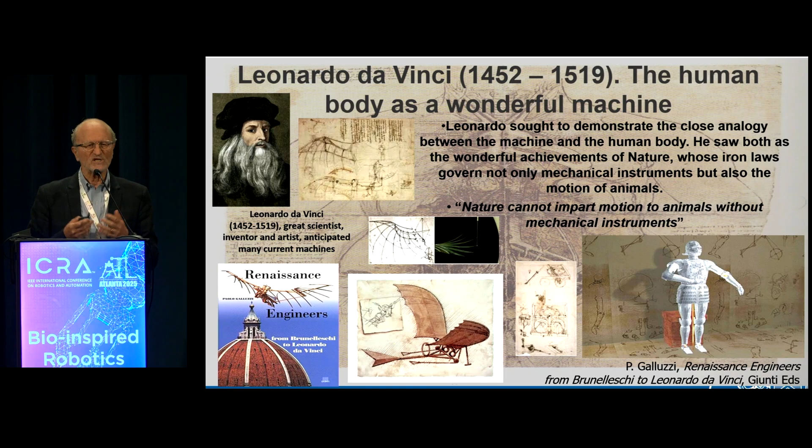So for example, you see what he wrote about the human body as a wonderful machine. And obviously, he was interested, probably was one of the first in the world to combine arts with science. You see here how he observed and analyzed the behavior of many biological systems, in zoology, in botany, and of course in human anatomy.

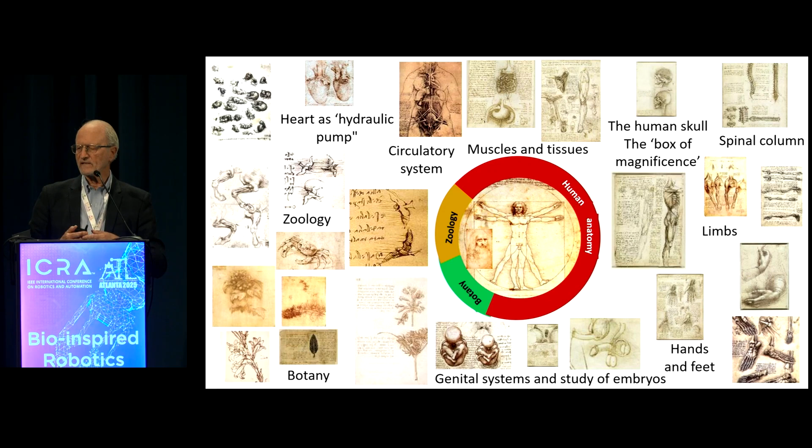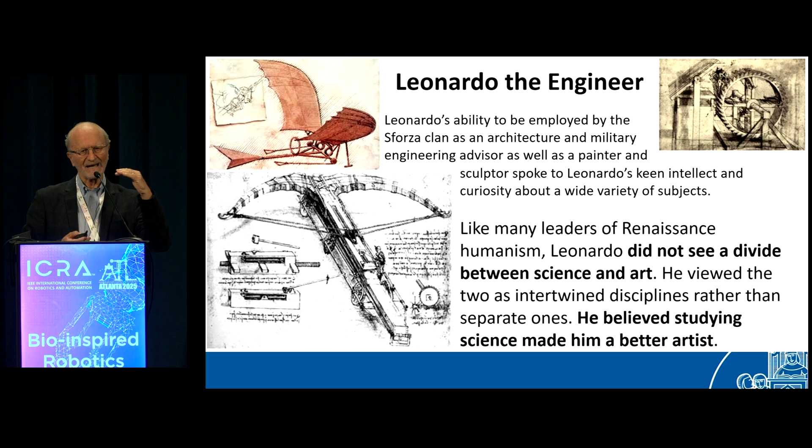It's fantastic. At the same time, he was a wonderful engineer. At the time, of course, he didn't have the energy source, he didn't have the materials, and what really made it possible to make the design, he was really inspired by nature, and he combined the systematic, scientific analysis of biological systems with engineering.

And today, we are addressing this fascinating field with the help of four distinguished speakers who are really leaders in the field: Kyu-Jin Cho from Seoul National University in Korea, Dario Floreano from EPFL in Switzerland, Talia Moore from the University of Michigan, and Yasemin Ozkan-Aydin from University of Notre Dame, also in the USA.

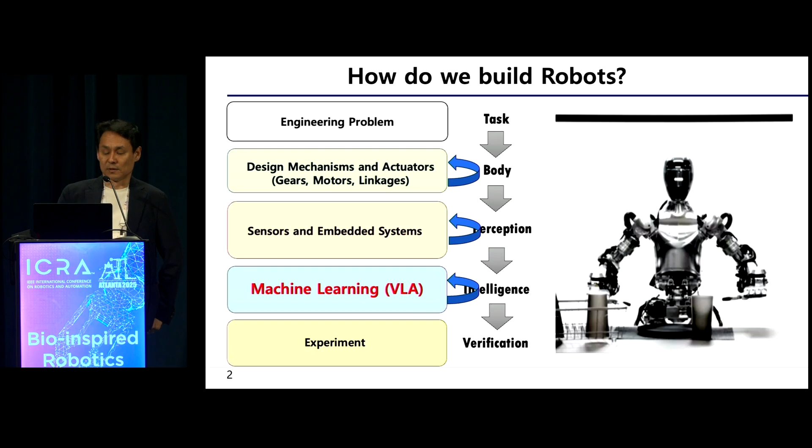These days, we have so many humanoids that's coming out. We start with an engineering problem, you design the body, and you attach sensors, embedded systems, and these days, because of the machine learning, like VLAs, everything, we have fascinating robots. And we do experiments, and most of the time there's a lot of iterations in each step, and of course there's some large iterations as well, but it's mostly a sequential approach.

How about nature? Learning - there's 3 layers of learning in nature, right? If you think about it, the highest layer is evolution, which learns across generations. And structures and materials are optimized by selection. You can think of it as intelligence is stored in its form and function.

And then there's development. It learns through growth, right? Bodies adapt based on the use and the environment, and form adjusts to the function. And the third, the last layer, is the neural learning. It's real-time behavioral adaptation, trial and error, memory and control, and feedback driven.

So at this point, we have a lot of advancement in the neural learning part, so that's why we have so many nice working robots. But I'd like to think about what we can do with the evolution part. There's a big difference between evolution, learning by evolution, and machine learning. Mostly intelligence is embedded in form and material, whereas machine learning intelligence is embedded in weights, models, and policies.

So Bioinspired Robots, I think it's about tapping into evolution's design archive, right? We have so many natures like insects and animals, so we're trying to find smart solutions from nature to overcome unstructured extreme environment.

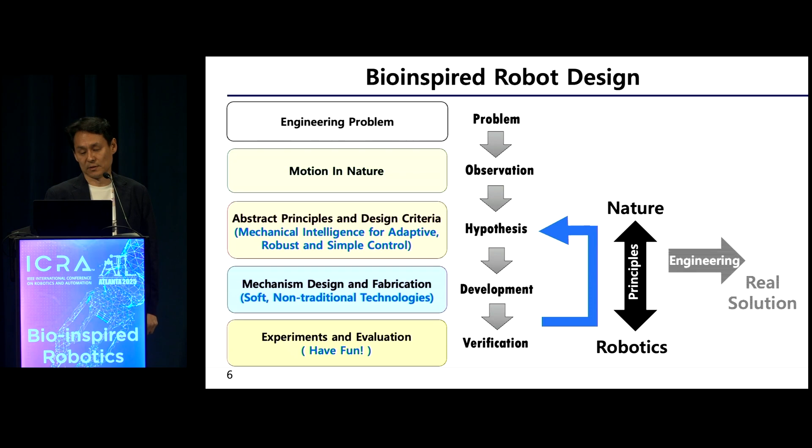And then you verify, you do experiments, and you have fun. You iterate until you find the real good principle that you can use. By doing so, we are basically going back and forth between nature and robotics. We are trying to find the principles in nature to design robots with principles, and hopefully we'll find the real solution for those examples.

So this was my first take on a bioinspired robot, which was jumping on water. The observation I had was from fleas. Fleas have a special morphology called torque reversal by a trigger muscle, where the extension muscle is originally put in place and you can pump in a lot of energy, and then a trigger muscle actually pulls the extensor muscle, thereby releasing the energy.

So what's happening is at the flexion state, it's stable, and you can pump in a lot of energy into the extension muscle. With the trigger muscle, the flexion becomes unstable and the extension state becomes stable. So it's changing the stable position—almost like bistable stability, except it's a controlled bistability. With this principle you can store a lot of energy easily and release it by pulling a small muscle. So we named this principle the torque reversal mechanism.

Imagine that spring—the red spring is a muscle. You can store a lot of energy, and then you pull the trigger, and boom, it can jump. This is compared to the escape mechanism. We thought it could actually distribute the force, which is really good for jumping on water.

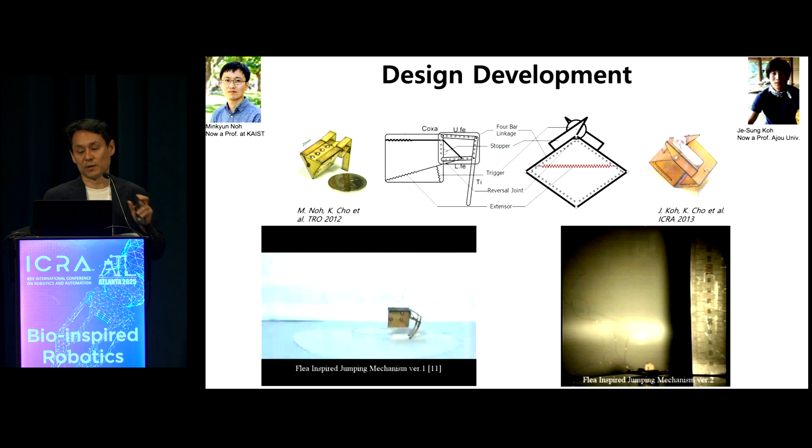So we kept developing the designs. We started with an actual flea-inspired robot, then simplified the robot, and built the robotic water strider. We were able to create a robot that actually jumped on water. This experience, which was very positive for us, gave us a lot of confidence in believing in design evolution. Mantis shrimp also has this kind of torque reversal mechanism.

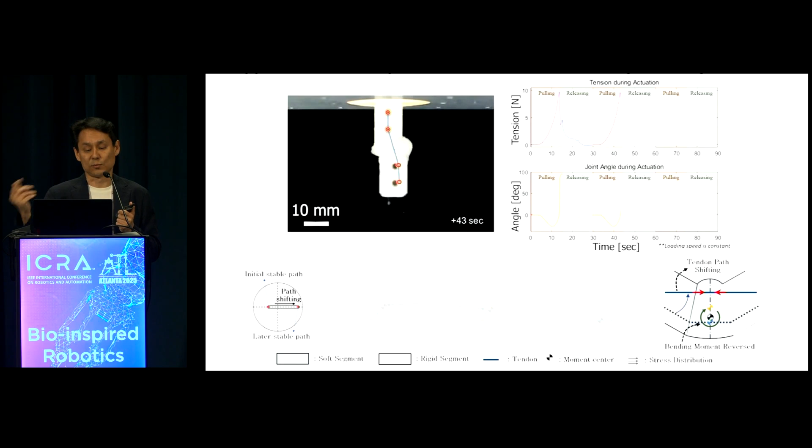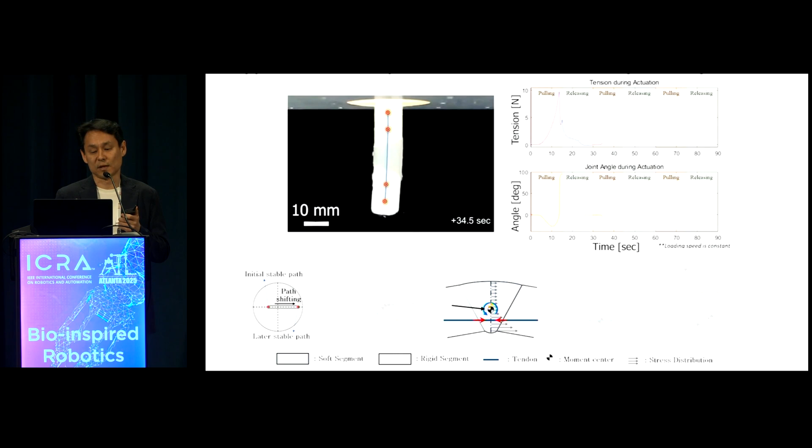So we tried to create this kind of torque reversal mechanism based on elastomers. We created an elastomer, and we didn't want to use extra trigger muscles, so we used a single muscle that could trigger the torque reversal because of the hyperelasticity of the elastomer. Because of that hyperelasticity, even though you're just continuing to pull the tendon, it actually passes through the center of rotation, and boom, it creates this kind of impact force.

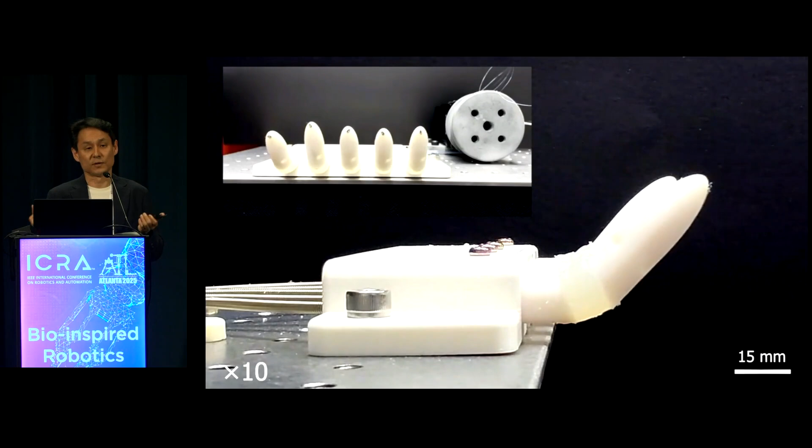You can see this kind of snap-through occurring, and using that principle, you can create these kinds of motions. You can create a finger—fingers that could actually grasp really quickly at high-speed swing, and so on and so forth.

Another example is a deployable gripper in nature: the chameleon's tongue, which has a preloaded geometry that powers the extension. The tongue tip actually adapts to the target shape via its tip geometry. So we were inspired to create this kind of gripper that could shoot out and grasp any kind of object.

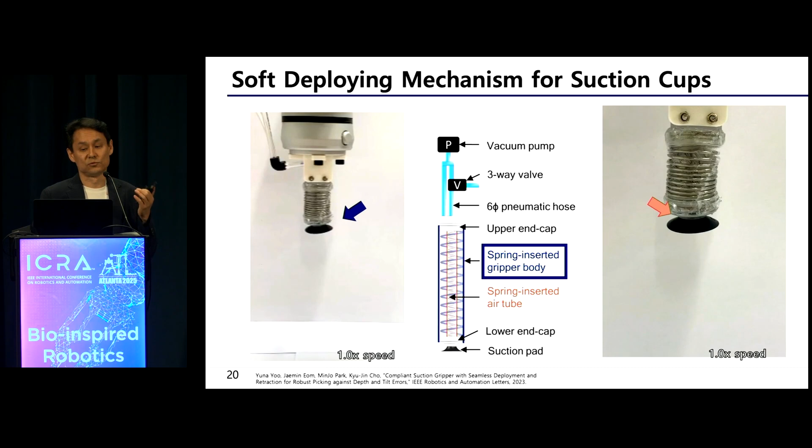So what we designed is a soft deployment mechanism for a suction cup. Basically we have a coiled spring and an extra chamber that can hold a vacuum. It's a spring-inserted gripper body that can elongate, and with the vacuum it can pull. So basically this is geometrically driven—it's a physics-based mechanical design.

What's happening is we have a three-way valve which actually disconnects the spring-loaded chamber, so you can pull the deployable gripper. As soon as you open this three-way valve, you have a chamber open to atmospheric pressure, and it deploys. As soon as the suction cup is closed, the vacuum can work again, so it automatically pulls up.

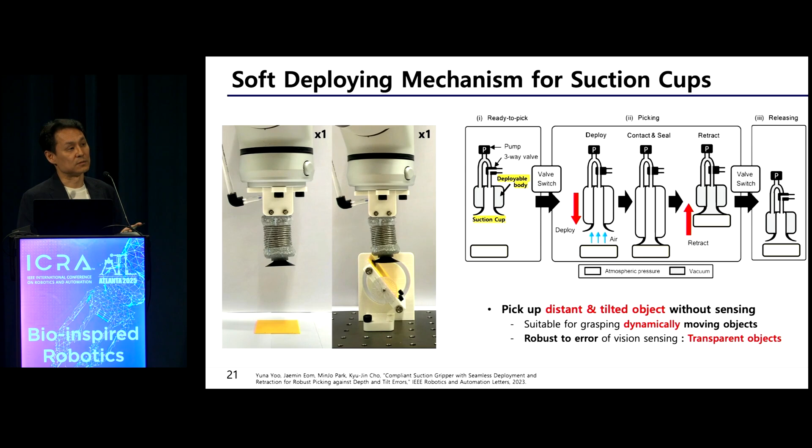It's a very simple mechanical design, but it can dynamically grasp moving objects, and it's robust to error of vision sensing because it doesn't really need any vision sensing. It's all mechanical-based sensing, so you can even grasp tilted objects.

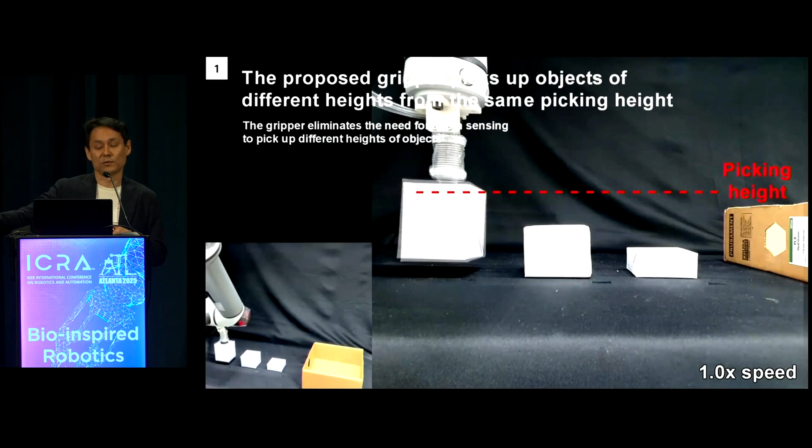Imagine if you want to pick up objects at a different height—normally you have to control the height of your arm to grasp something. Here you don't need to control the height of your arm. You just go to a certain height, deploy your arm, and as soon as the suction cup is closed, it picks up the object and you can go. So it's very highly adaptable.

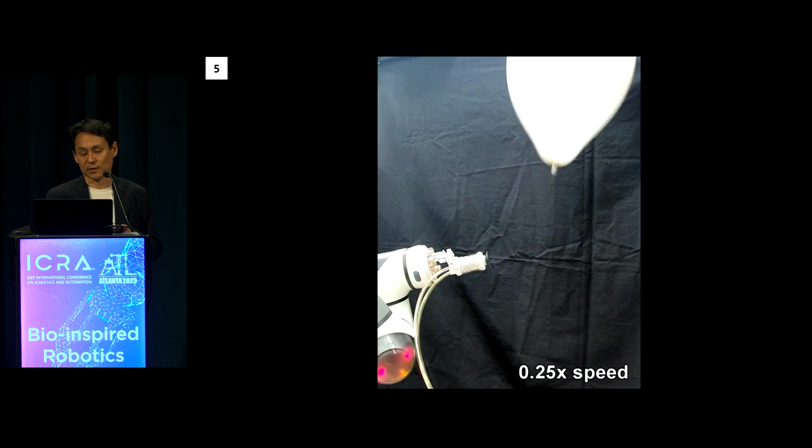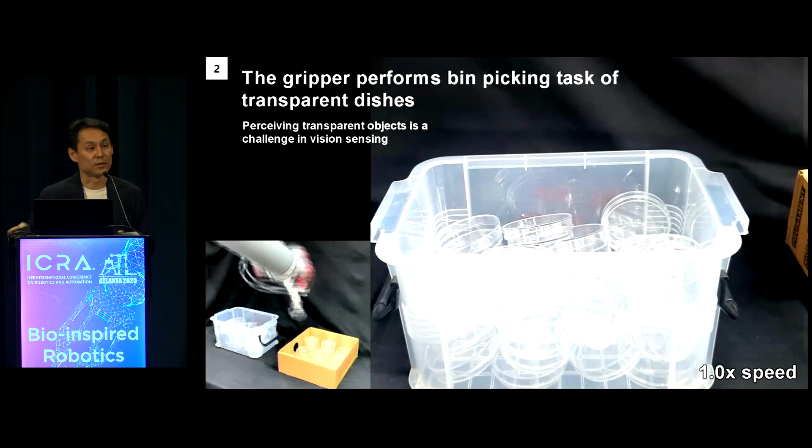Since it's very highly adaptable, you just deploy your suction cup, and it can grasp this kind of balloon at very high speed. Imagine a transparent tray, which isn't easy for vision to recognize at a tilted state—you don't need to recognize the exact position of the objects. You can just shoot and deploy, and it will automatically pull up the objects, making things easy to grasp. No need for computation, no need for sensing—it's all based on mechanical intelligence.

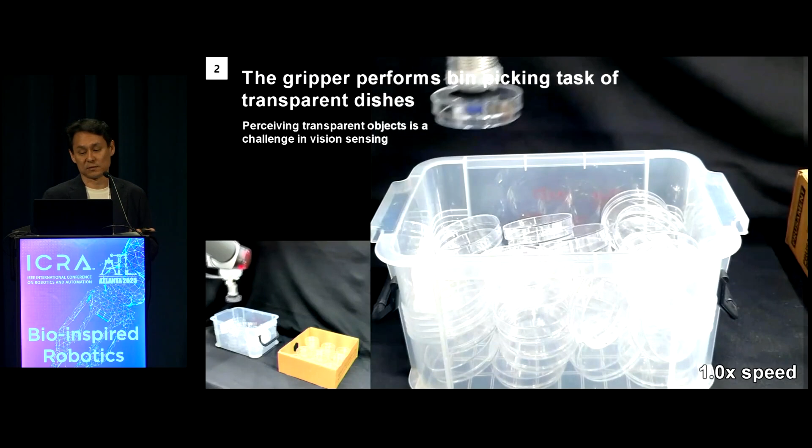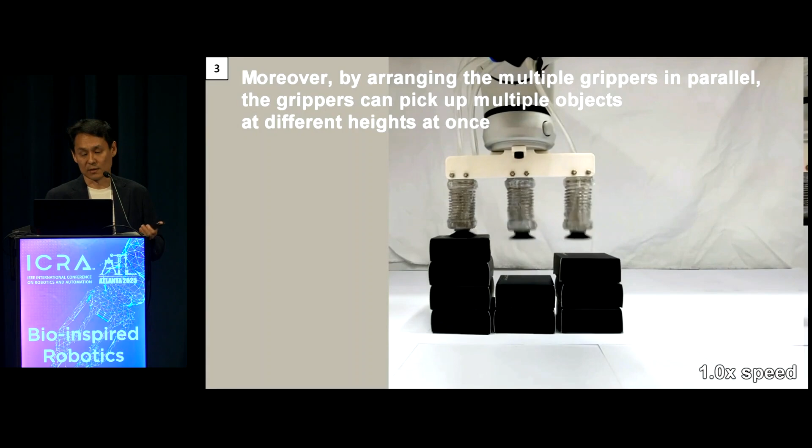If you want to pick up multiple objects, normally grippers have multiple suction cups, but they're all at the same height. With this kind of multi-array suction cup, you can pick up objects at different heights. We're trying to use this gripper in unstructured environments, so you can even do this kind of narrow gripping.

Another example I'll show you is the assembly of a 3D printed hand with bioinspired joints. We got interested in creating a bioinspired hand, and looking at existing hand designs—prosthetic hands, DARPA hands, and so on—we were quite overwhelmed. What we didn't like was that they have so many parts, taking so long to assemble one by one.

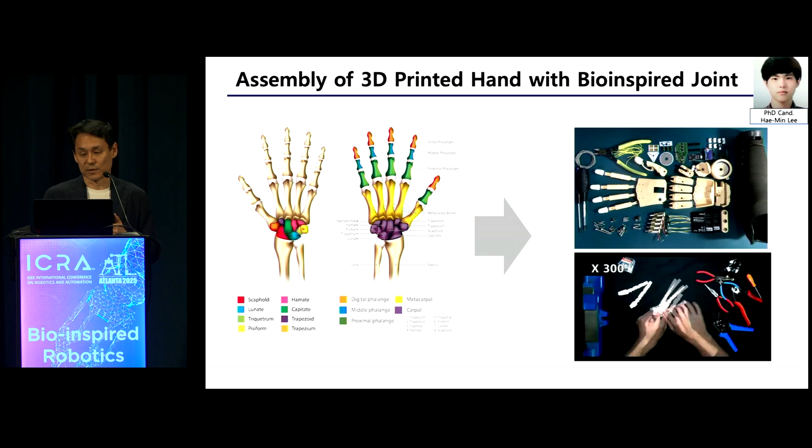If you look at how nature creates articulated mechanisms, it doesn't assemble, it grows. It starts from something and grows. Imagine if it was a pin joint, which all robots use right now—you cannot grow that. But because they're rolling contact joints, you can grow it, which is very analogous to 3D printing—you print by growing. So we thought maybe we could use 3D printing to remove assembly.

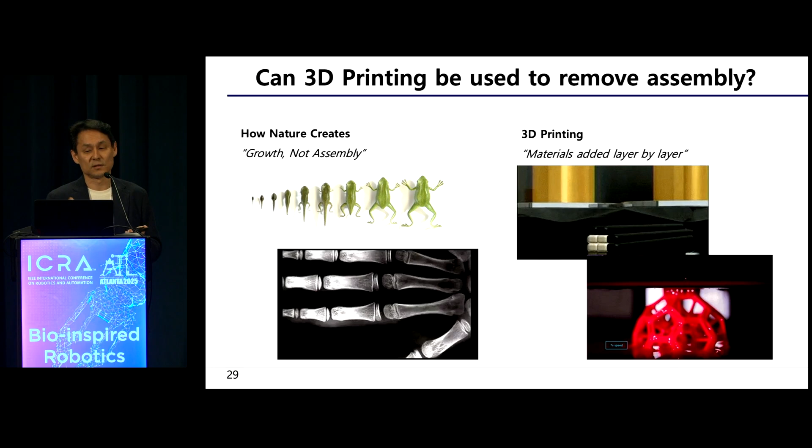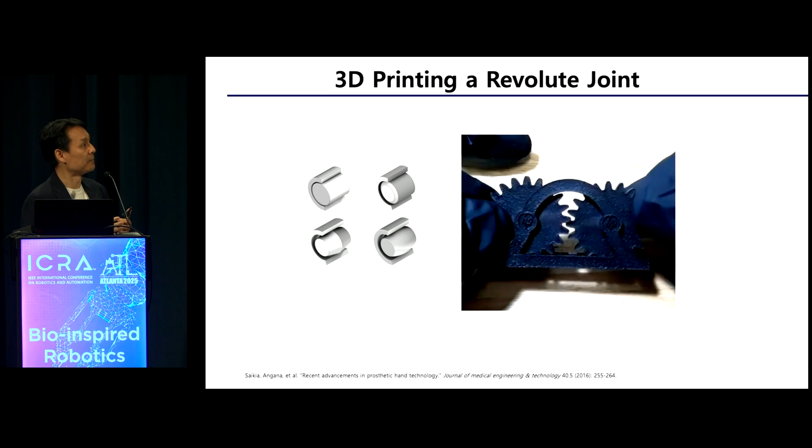We all know 3D printing allows you to build anything you want, but that thing is a structure, not a mechanism. As soon as something has to move, you have to assemble it piece by piece. There are things like single-step printed joints you can see in exhibitions, but there's always a gap, and because of this gap you can only use it as a demo, not as a real thing. So what can you do?

What can you learn from the human metacarpophalangeal joint? If you look at the MCP joint of the human finger, it has a rolling contact joint and ligaments. The collateral ligament, at the extended position, is loose, but as soon as it flexes, the collateral ligament tightens. So at the extended state it has a gap, and at the flexion state there's no gap.

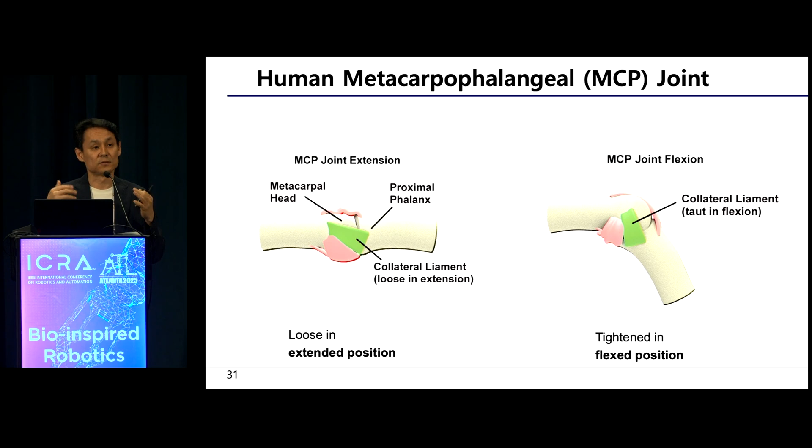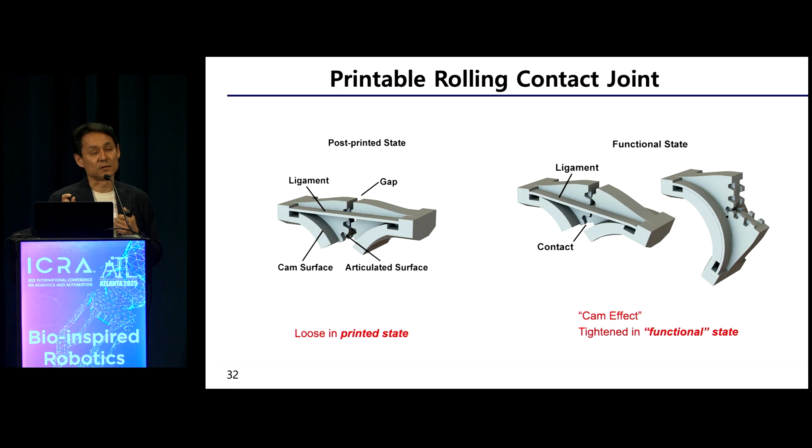Inspired by this principle, we designed a bioinspired rolling contact joint where, after printing, we have a gap. We print the ligaments and the rolling contact joints, and because there is a gap, we can 3D print it. But as soon as it starts moving and flexing, we can remove the gap using the cam effect. Using this simple mechanical design, we can print the whole hand with multiple joints.

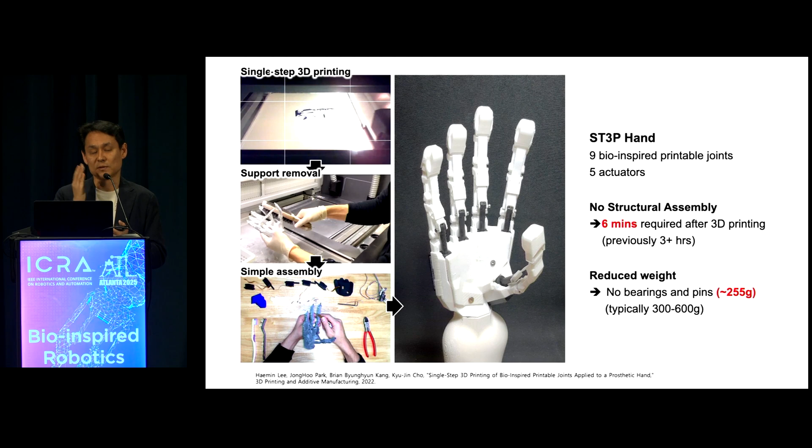Because this is a rolling contact joint, compared to other approaches—of course you can print compliant joints and print the whole hand, but compliant joints are not that robust. This rolling contact joint is quite robust, and no structural assembly is needed. You just have to attach motors onto the hand.

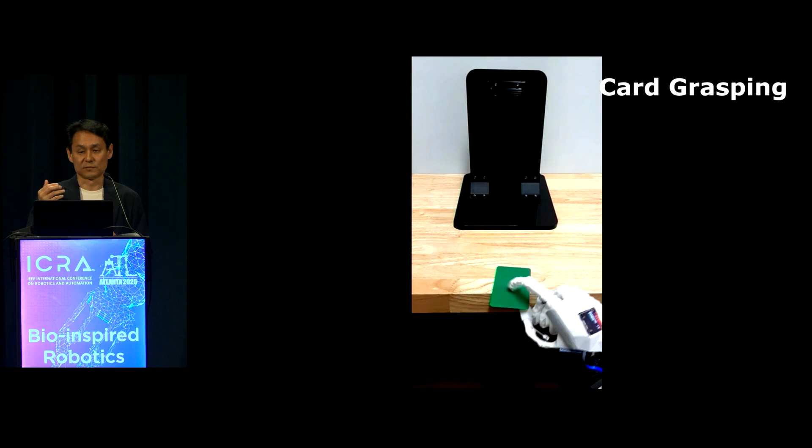What we found out while testing this ST3P hand was from testing on an actual patient who uses prosthetic hands. He said he just wanted a hand comparable to what he was using, any kind of 3D printed hand, but told us this is good because it's very lightweight—lightweight because we don't have any metal pins. Even just the metal pins, if you collect them all, that's around 20 grams. So that was another additional benefit we were able to get.

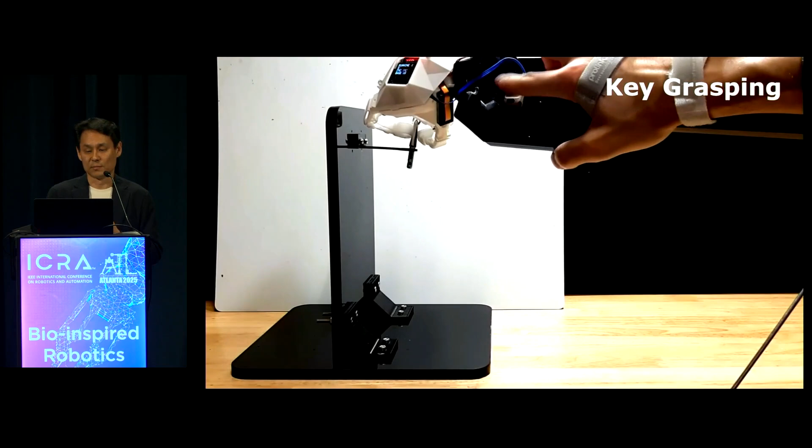So we are at this stage right now, and we are also trying to improve this design. But hopefully, we always talk about what if we can 3D print the whole robot, right? You've probably seen Westworld—the intro shows 3D printing of the whole human body. Maybe in the future, if we want to do this, we will have to 3D print a joint, and I think with our approach it might be possible to do something like this.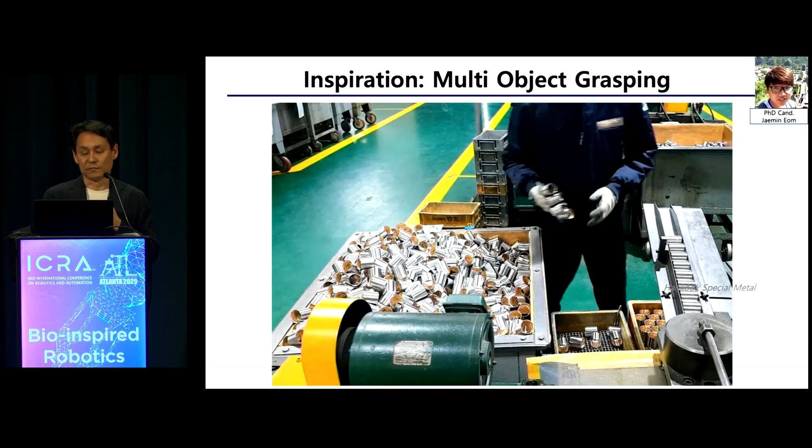Lastly, the last example I want to show is about multi-object grasping. We saw this video about 5 years ago. We were trying to just build a gripper, but as soon as we saw this video, I was like, what? Look at that—he's grasping like 5 objects at once with all the fingers. Wow, okay, yeah, that's very obvious, right?

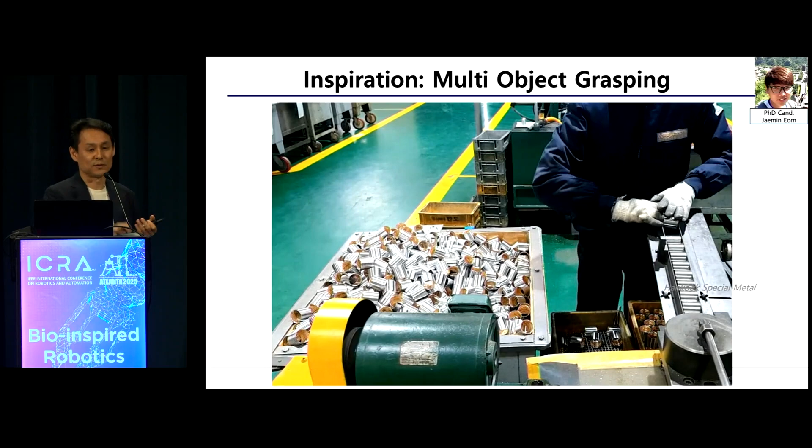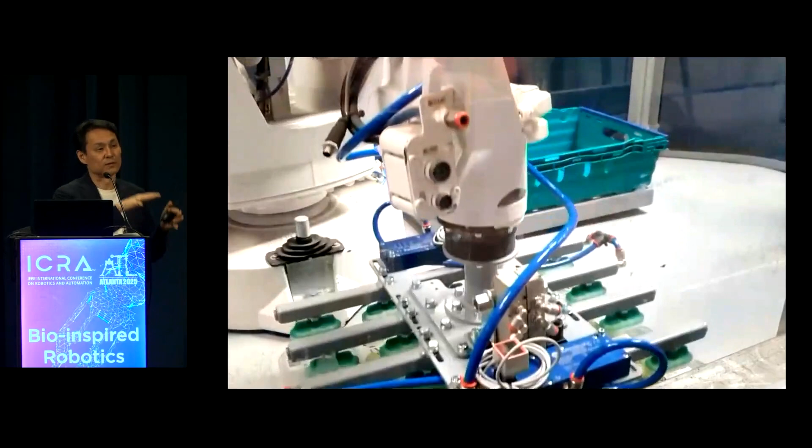Humans actually do this all the time. But robots, of course they do multi-object grasping, but in this kind of structured environment, right? You've got to have everything lined up, and you can actually move many things at a time. So if you observe human strategy in an unstructured environment, humans actually do this. So we started looking into what this is.

So we looked into the principle we needed to use: finger to palm translation. It's one of the in-hand manipulations, called in-hand translation. It starts by segmenting your hand into a grasping section and a storing section, and then you can do finger to palm or palm to finger movement using the thumbs.

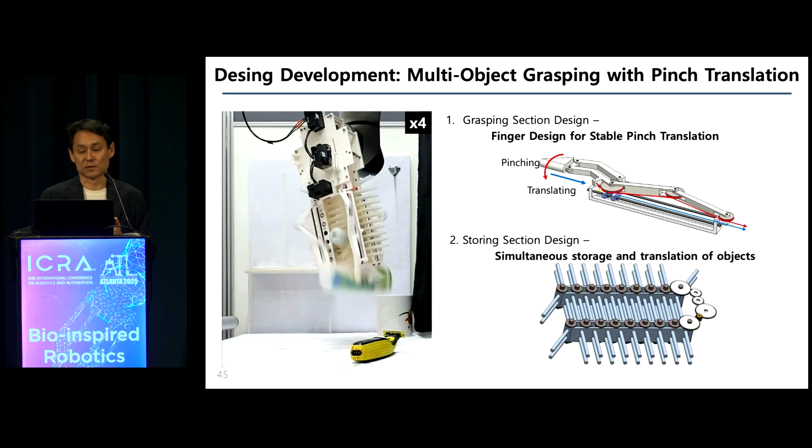And this is the design. As you can see, it doesn't look like a human hand, but we are using the same principle, finger to palm translation, and we used the best engineering possible to build a finger design for stable pinch translation. We decoupled the pinching from the translation, which simplifies actuation. The storing section was made so that you can store many objects.

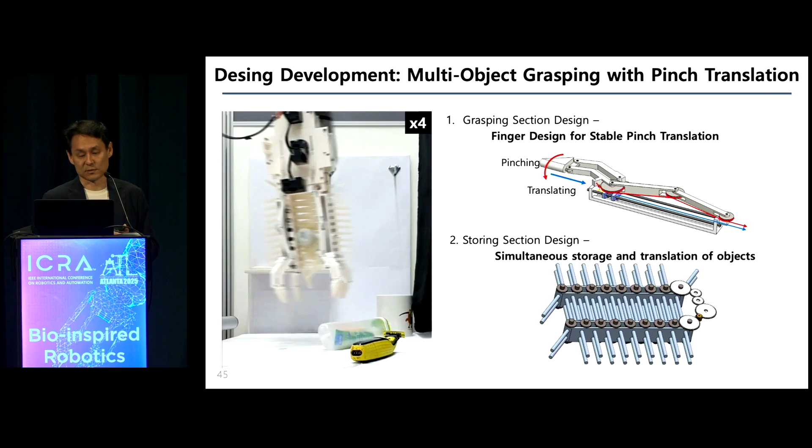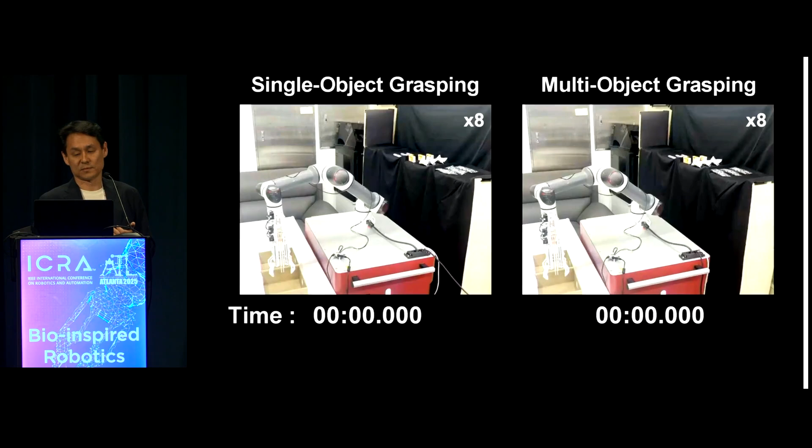So imagine if you had a robotic gripper moving objects one by one—it's going to take a long time—but by doing this, you can reduce the time. So we were able to do that.

So my takeaway is: not everything needs to be learned. Nature has already learned through evolution, and we should tap into evolution's design archive. We should try generality through simplicity, not through complexity. And if you embed principle in the mechanism, that would be right. So let's keep learning from nature, keep designing robots that already have intelligence.